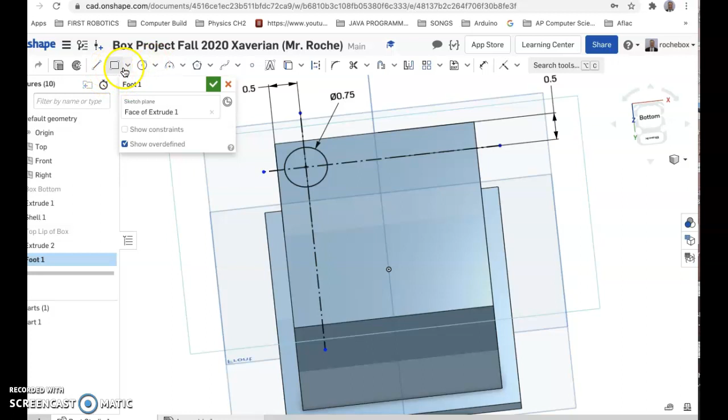So what I'm going to do is add an extra construction line here. Whoops, I forgot to put my construction tool on. Let me see if it'll just do this. I hit escape to get out of a tool, and I want to view normal sketch plane, to make sure that's straight. I'm going to dimension this as well, just to make sure it's 0.5.

Now I want to use these tools. There are ways to do things like mirror something across a line, do a circular pattern, or do a linear pattern, or put something in a different place - like if you're designing a shoe, this would be super useful. In this case, I'm going to make a linear pattern because I want this circle to be down the line, another copy of it. And what's cool is I can do it in 2 dimensions.

So I'm going to put this one down here too. To do that, I might make another guideline just to be sure. I'm going to hit the guideline tool and go in here to make sure these are parallel. This is telling me it's perpendicular, which is good. Okay, good, right? So we want that.

Then what we're going to do is hit escape and dimension this - like this to this, not to that, to this. I'm just going to pull this down here to keep it out of the way, 0.5. So there we go. Now what I want to do is actually use the pattern tool.

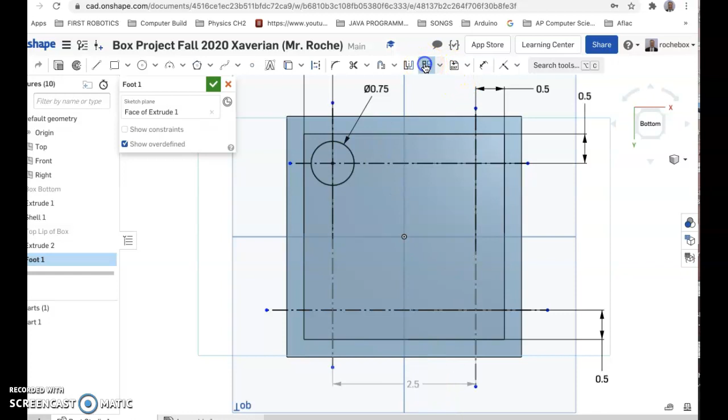This is the linear pattern here. I don't want to do it 3 times - I mean, if you want to do it 3 times, that's kind of cool, but let's do it here and do it 2 times. And take this and make it 2.5. So that's pretty cool, right? And then that'll get me that, right?

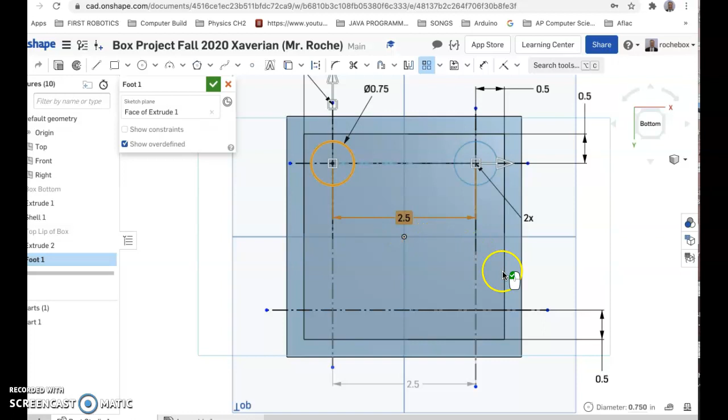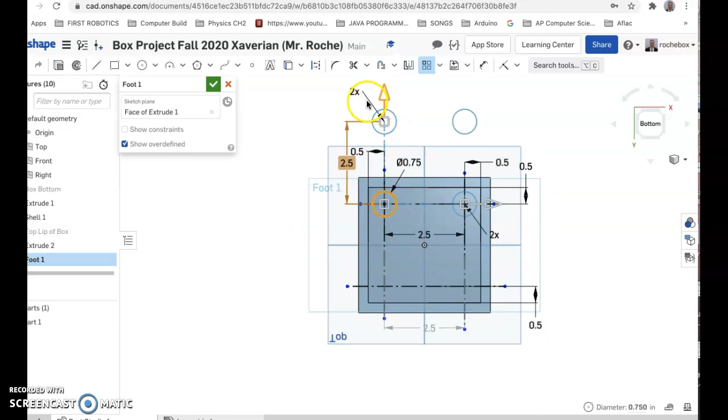Then this one has it only going in one direction, so I'm going to pull this down this way and see what happens. All I need to do is try to make this second pattern group. I'm just going to go like this and make this 2.5. Oops, going the wrong way, of course. Sorry about that. Let's make it go this way.

Oh, I have to make it negative 2.5, because I wanted to go the other direction. And there you have it. It's telling me with the little mouse to click that so it agrees with it. And there we go - we've gotten 1, 2, 3, 4 exact things, which is kind of cool, right?

Pretty nice. So you can have 4 of these, you can have 5, you could have 6 of them, you could do a whole bunch of things with this. So that's pretty great.

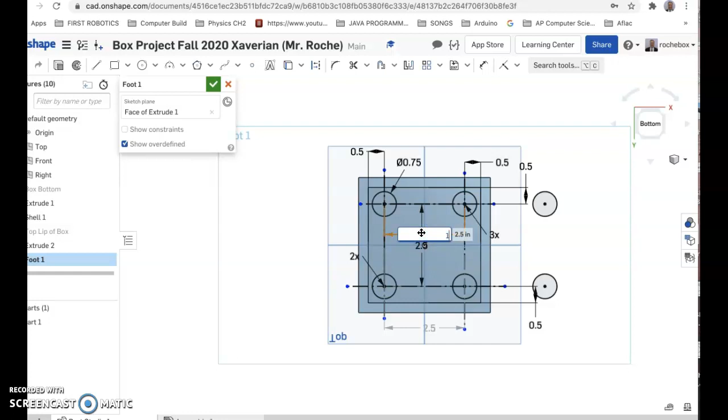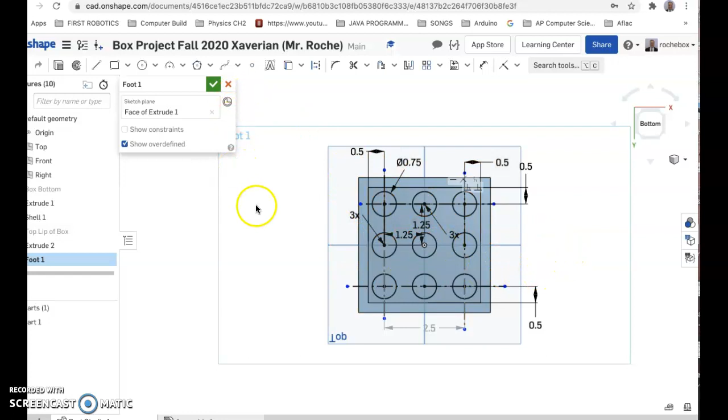I think I can adjust this too. Let's say if I want to go to 3, right? But I would change this dimension here to 1.25, and there you go, like that. So that's kind of cool too. And maybe I want to do this one 3 again - see, that's too far, so I'll change this to 1.25, and there you go. Now I've got all these little - it looks like a Lego, doesn't it? These little feet that I could use.

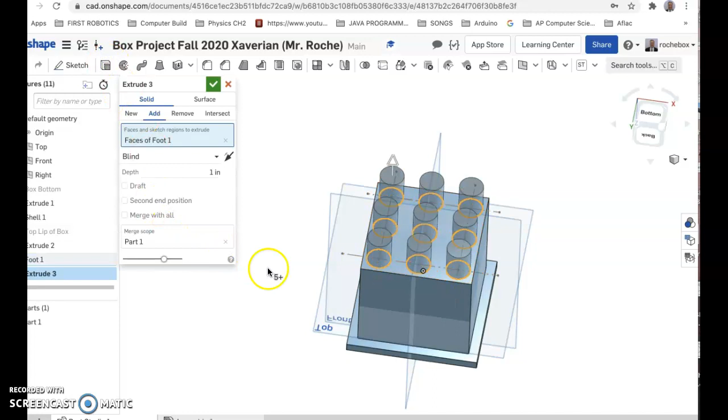So let's go for that. If I want to extrude this now, I can go like this to hit foot 1, and I can hit the extrude button. What's going to happen is I get all these little feet. So that's pretty cool. I might change them to be 0.75 because that's what they are, so they look more like square. And that's good.